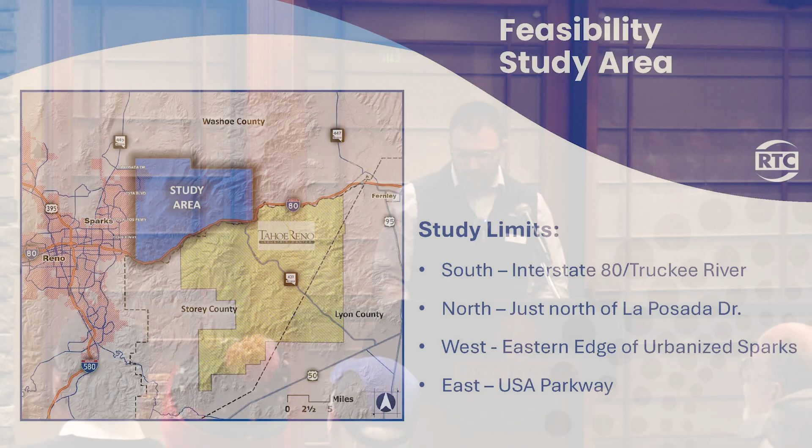So what is this study? Why are we doing this? So the Northeast Connector Alignment Study wants to focus on finding a redundant east-west corridor connecting the Tri-Center area to the Spanish Springs Sparks area. So that is why we are doing this study.

Traffic, that's been a main topic of focus tonight. We all know there is an abundance of traffic on the I-80 corridor that is causing delays and is a concern. We've had a 300% increase out to the Tri-Center workforce recently, which is a lot of traffic. We've also focused on where these trips are being generated from. You can kind of see in the map in the upper left what we call our heat map, showing where most of the trips going out to the Tri-Center are generated. And you can see that it's north of the I-80 corridor, mainly in the Spanish Springs, Sparks, and the North Valley area.

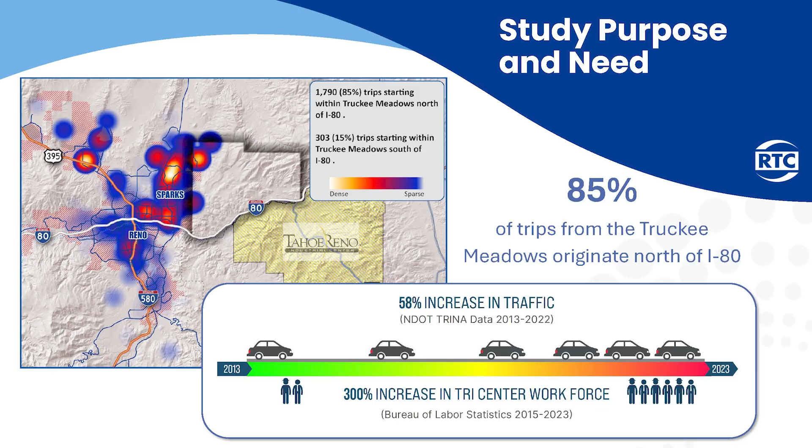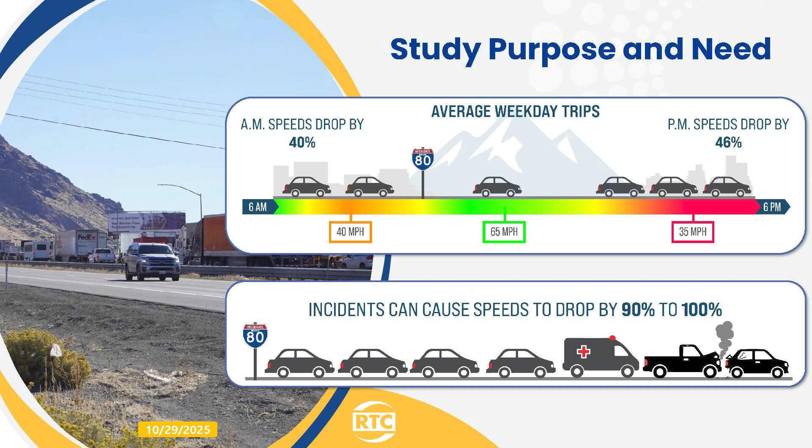The speed on I-80 has significantly reduced. If you've driven out there in the AM or PM hours, you notice a significant reduction in speed, and this is without an accident or an incident on the road. This is due to just pure volume of traffic on the corridor. If there is an incident, then that can definitely grow. It can be gridlock, and it can take hours for you to get back into the area. Right now, I believe we're averaging about 150 accidents a year, so that is every other day an accident is occurring on this corridor. So that is something that we are taking into consideration and focusing on.

The goals of this study. We focused on reducing congestion, supporting the economic growth in our area, increasing the reliability for people to get back home or have an alternate route, and informing regional decisions. So these are the goals that we focused on through our evaluation.

So where did it start? It started back in February when we initiated this project, and we went through a 2-level screening process. It's highlighted in the report and on our boards, and we'll get into the weeds of this shortly when Brian goes into that. But our level 1 screening focused on just a traffic perspective, analyzing what kind of volume or demand would be generated if a road were to be built. We take that into our level 2 screening where we analyze it further with our environmental concerns, travel time, and so forth.

Right now we're at the draft report phase. The last piece of this puzzle is to get the public comments, public input, answer your questions and concerns, and incorporate that into our report. We're looking to finish this up early next year, so that is why we are here tonight.

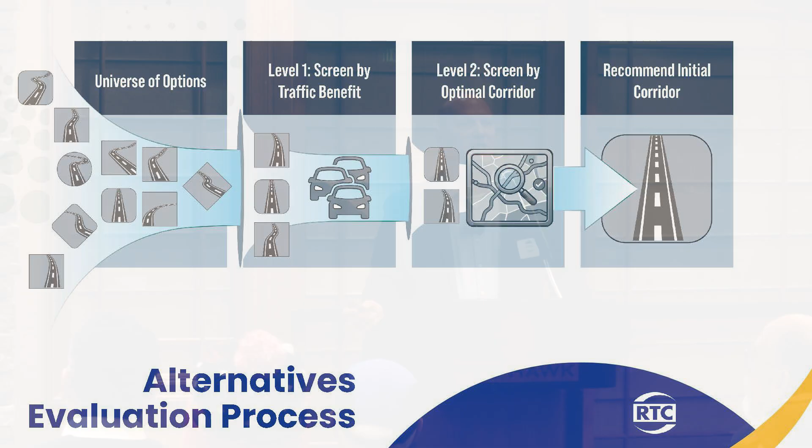The first thing we did was take a look at the traffic element of that, and then those potential corridors that didn't seem to attract a whole lot of traffic, you screen those out, and then you focus time and energy looking at some of the engineering elements of those that remain. And through that process, you end up with one concept rising to the top.

So before I get into the details of what that process looked like, I want to make sure we had a baseline understanding of what kind of road we're even talking about here. The traffic volumes that were evaluated through what's called a travel demand model support a 2-lane roadway, 1 lane in each direction. So we're not talking about a freeway, we're not talking about an expressway, we're not even talking about the need for a 4-lane facility for typical operations under normal conditions. So everything we're talking about here, all the lines on paper, are considered a 2-lane roadway.

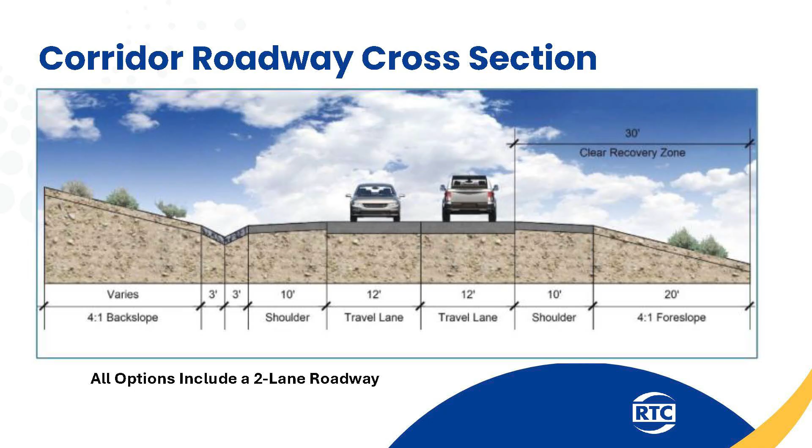Coming down from there would be a connection at Vista, here where Golden Eagle Park is, in that existing signalized intersection. Another option that came up was tying into Vista south of the Red Hawk Golf Course for the Hills Course.

And we used what's called the regional travel demand model. Without getting too technical, every metropolitan area has one of these models that puts in land use, different types of uses, whether that's commercial, residential, industrial, the intensity of those, and the background roadway network, and grows those out to project what future traffic volumes will look like. That was a tool that we used for that.

So a lot of people have asked the questions, have you considered additional development in the area? Have you considered other roadways that might be built? And the answer is yes, because those are baked into that model, because we're looking at everything from a 2050 timeframe. That's the analysis time period we're looking at. And so this table here, and it's available out there on the boards if you want to dive into it, shows our 2050 ADTs coming out of that model. ADT is average daily traffic. So many cars on the road in a day on an average basis.

And the general takeaway from this first level of screening was the further south you go with the origination of that western terminus, the less traffic it carries. And it makes sense because I-80 is a faster facility. It's already assumed to be widened in this model. And so you would have a faster travel time than going on a 45-mile-per-hour roadway through the mountains. So the closer you get to I-80, the less traffic that these alternatives would attract.

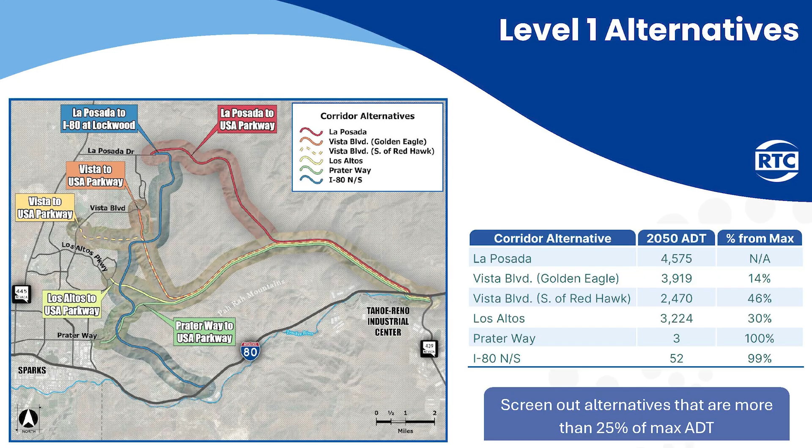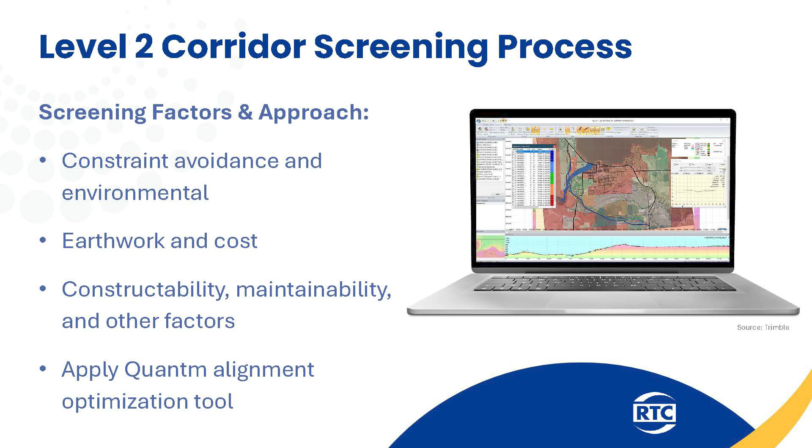And level 2 is where we start doing some engineering and getting into things like alignments and costs and all that kind of good stuff. So we're looking at that level 2, and we start to do the engineering piece. We're looking at things like constraint avoidance. That's a very fun way of saying, watch out for the environmental stuff or other constraints that you can't touch. Earthwork and cost, there's a lot of earthwork associated with a project like this, so that gets taken into consideration. How easy it is to construct. Agencies have to maintain this. How easy would a new facility be to maintain? And a range of other factors. And we're not going to dive in too deep into those because those are in the draft report if you want to get into the details.

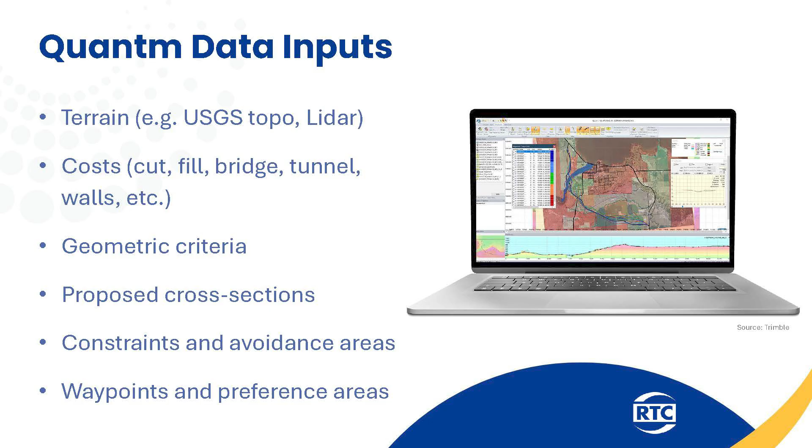But to quickly expedite the process of evaluating those engineering elements in our level 2 screening, we applied a tool called Quantm. Now just to give you a brief overview, you put in terrain information, topography. We actually had, if you're familiar with the term, LiDAR data, so pretty good data from a terrain standpoint. You put in potential costs, you put in your geometric criteria, because we're talking about things like vertical grades of a road and radii and things like that, and our 2-lane roadway cross-section. What this tool does is it takes that information and it runs millions of iterations to come up with a top 25 most optimized corridor from a beginning point to an end point. And I'll give you an idea of what that looks like.

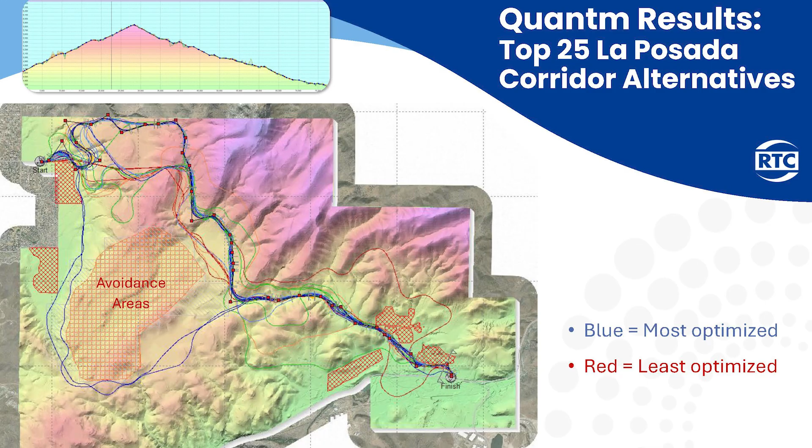And the general takeaway with the best alignment showing in blue is it wants to work its way to the north to get up to a high enough elevation near Spanish Springs Peak before it can tie into the plateau to the east and work its way down. There's a much bigger elevation change to the north than what you will see on the south. So without getting into too much detail, just wanted to get a picture in your mind of what this looks like when we're doing this type of analysis. For the southern corridor, this is what the output looked like.

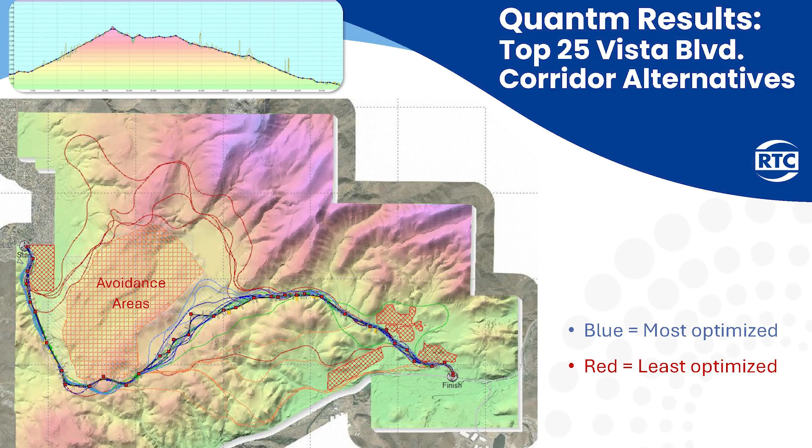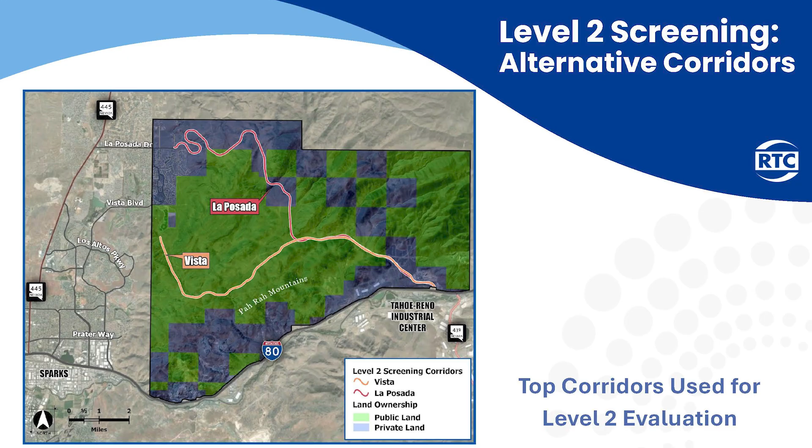So through that process, we ended up with two general corridors that had a little bit of engineering to it. The La Posada extension, which you see at the top, and it has that curling action to get to that elevation that's needed, and the Vista at Golden Eagle version coming down and around and tying over to USA Parkway. So now that we had those corridors established from a rough engineering standpoint, we're able to evaluate those against other factors to see how they compare to each other.

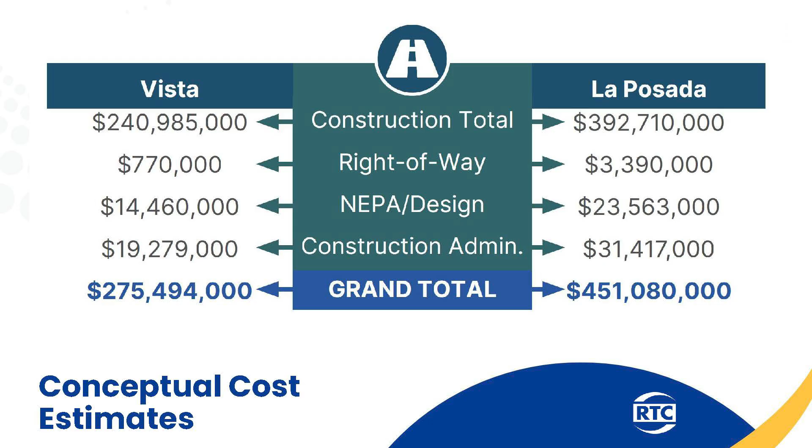The other element that comes into play as part of the level 2 screening: that's the engineering side of the equation. There's the cost side of the equation. Now that we had a rough corridor to cost out, we developed a conceptual cost estimate. As you can see, the Vista corridor came in, order of magnitude, around $275 million all in, including design, right-of-way, and elements like that, where the La Posada version was around $450 million. I wouldn't take those numbers to the bank, but it gives you an order of magnitude feel for the differences in cost between those two corridors.

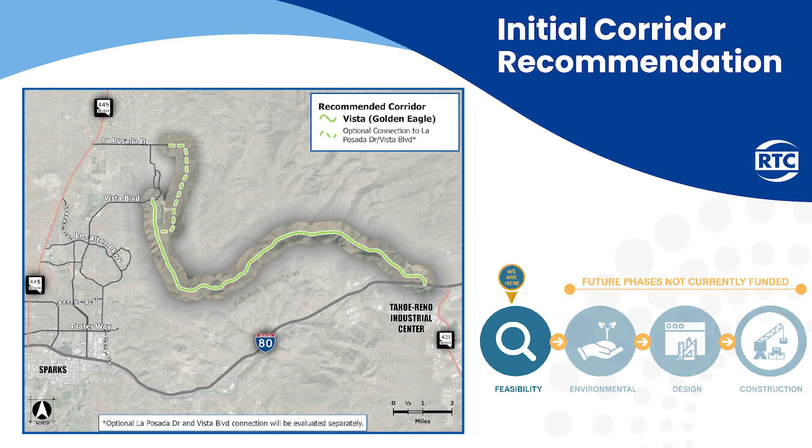So based on the evaluation and the differences in costs, we arrived at a recommended corridor, that being the Vista Golden Eagle tie-in coming down around the south side and heading over to TRIC. Along the way, we've heard a lot of concerns about potential cut-through traffic through the neighborhoods. And so the recommendation is to keep considering an additional connection up to La Posada to help spread that traffic out, so you don't have a single point of influence, and to avoid that neighborhood cut-through traffic. So the recommendation is to consider the entire package that you see up there moving forward.

Thanks, Brian. Just to close out, I wanted to highlight again that we are in the very beginning phase of this. This is the feasibility level. We still have NEPA, design, and construction if those are chosen to go forward.